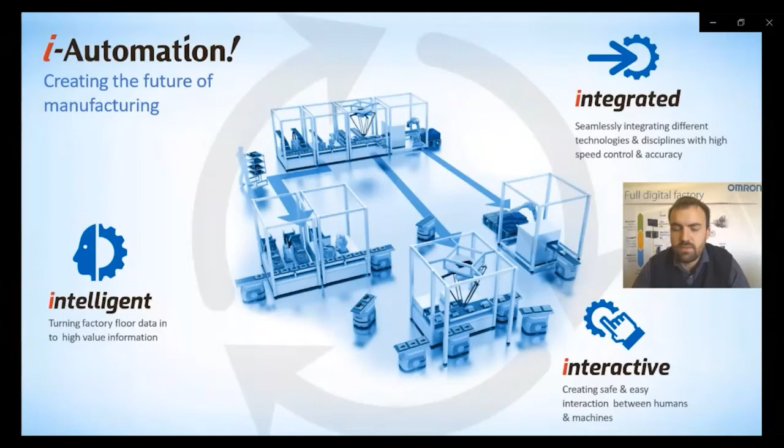The automation solutions we develop are designed to address the operational challenges manufacturers face when striving for highest quality, sustainability, and operational excellence. These solutions are efficiency, flexibility, safety, security, connectivity, and quality, which we will focus on today. Quality is achieved through our integrated high-speed, high-resolution inspection systems, combined with technology to enable serialization and traceability to ensure error-free products and waste reduction.

The challenge for manufacturers is how to harmonize all these external factors when they converge with manufacturing and their key business priorities: brand protection, sustainability, operational excellence, and ensuring the investment required to achieve highest quality products with full traceability.

OMRON's traceability through serialization: the regulations imposed by governments are getting more and more strict every day. Governments require manufacturers to track their products from where they're manufactured till where the consumer buys it. We find these regulations in almost all international companies.

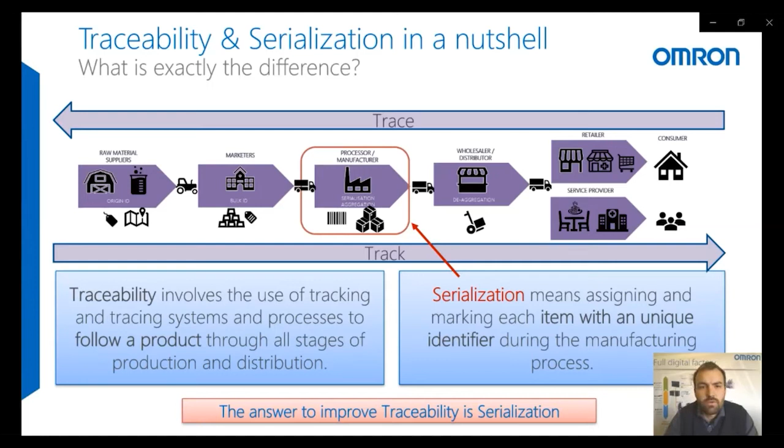A typical solution would look like the following. First of all, you would print the label, then verify the label with a camera, then read that barcode, sending it back to the cloud, and then aggregate all of this into one pallet where you can use an RFID tag, for instance.

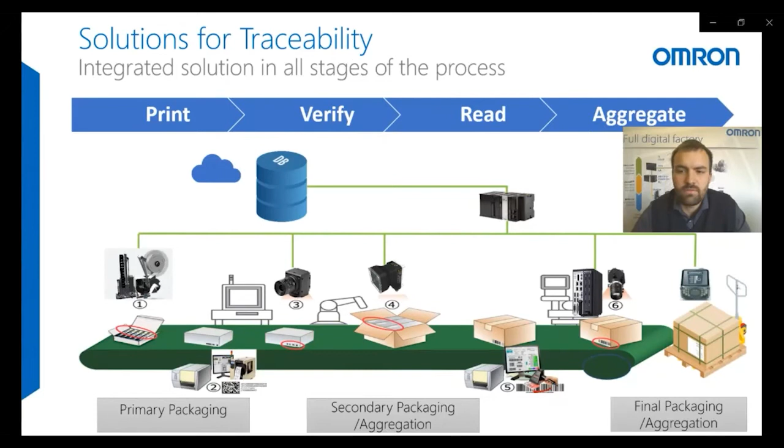The impact when deciding on a serialization product must be evaluated, taking into account that the solution is simple, quick, and has a low total cost of ownership. Therefore, choosing the right technology partner is key for successful implementation.

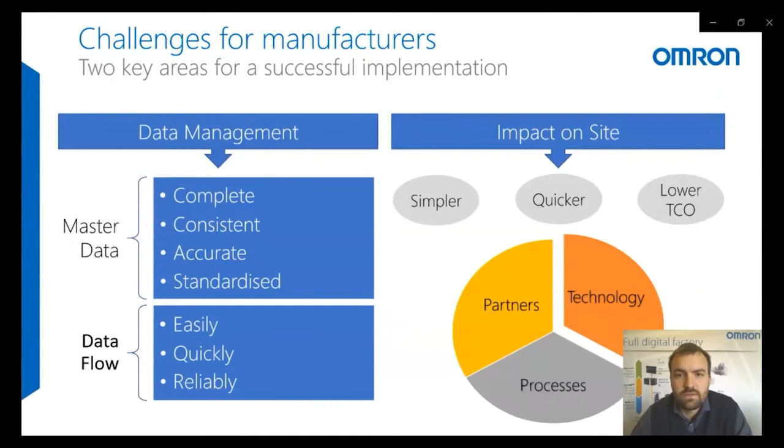So why OMRON? OMRON offers a full turnkey solution when it comes to traceability, from scanning the product, controlling it, and sending the data to a database. All of this is done through our powerful Sysmac platform.

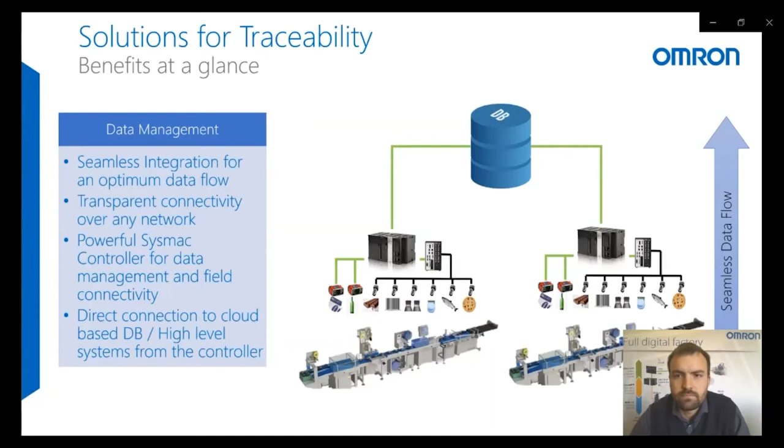On the scanning side, OMRON offers a wide variety from basic barcode readers to high-end, high-speed AI systems. These products are easy to use, compact, modern in appearance, design and usability. The camera that covers most of the portfolio is the FHV7 camera, the one you'll see here in the middle.

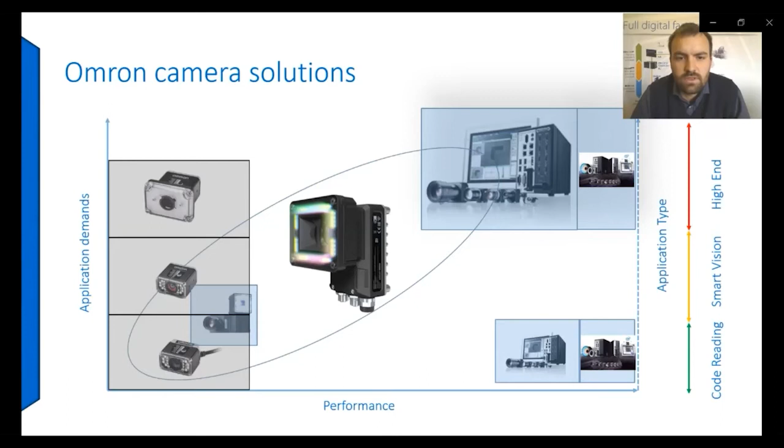Our latest camera launch, the FHV7, with its IP67 rating and best in class for speed and resolution, has the ability to get most vision jobs done without a hassle. Its modular approach also helps with consumer demands. The liquid lens just puts the cherry on top, with a perfect focus within 150 milliseconds.

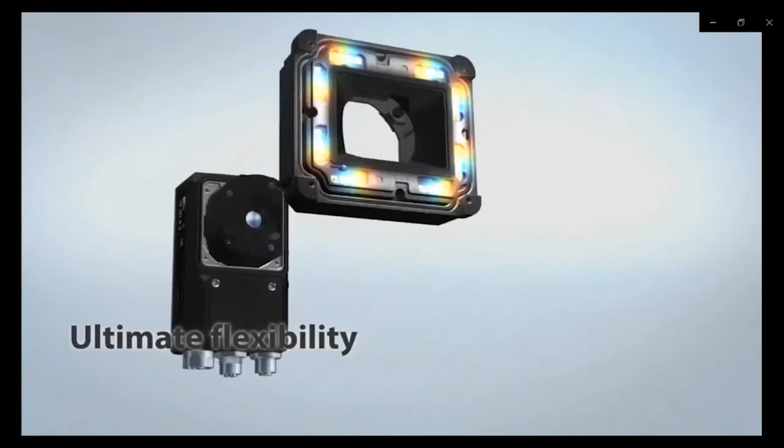OMRON technology is your key to a successful traceability and serialization project. OMRON's cameras read most barcode symbologies. With our vision systems, OCR fonts are teachable. Our RFID readers also help with robust packages.

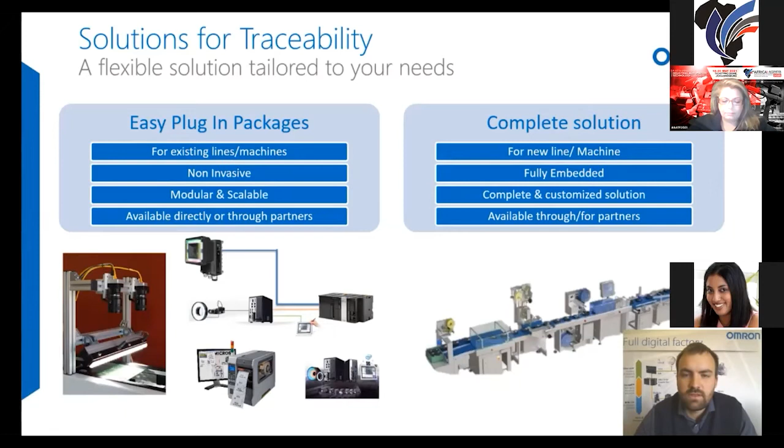OMRON has two different types of offerings for traceability and serialization. Plug-in packages: modular, scalable, and easy-to-implement packages for existing lines or machines at every stage of the manufacturing process. Then we also have complete solutions: fully embedded traceability for new lines or machines.

A few familiar applications where companies were very thankful they had a traceable solution implemented. The sardines recall that could have caused fatal illness. Some of the cans were compromised during the sauce filling step on the production line, which could affect the safety of consumers.

The Kuga recall: Ford recalled 4,556 1.6-liter EcoBoost Ford Kugas produced between December 2012 and February 2014. This was because of a coolant loss. Ford rerouted the coolant line and replaced the affected components.

Lastly, an everyday traceability example: the blood bank. Each qualified blood bag is affixed with a unique barcode or RFID tag with corresponding identifiable information such as blood type, the exact place where it is stored, collection date, and expiration date.

From the donor to the final recipient, the movement of each blood bag is being tracked. All the data is transmitted to the cloud in real time so that the hospital administrator has real-time visibility into the blood inventory.

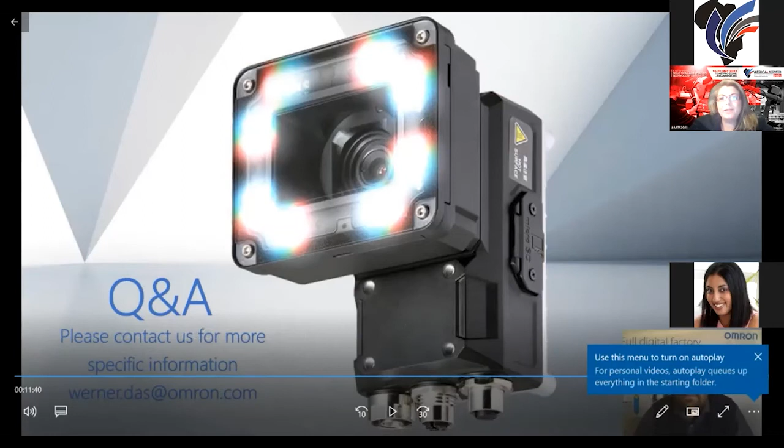The first question from the audience is, how does OMRON comply with FDA regulations?

OMRON added an electronic auditing system to its FH camera system, and this helps the manufacturing line comply with FDA 21 CFR Part 11, which requires an electronic record and digital signatures instead of paper-based documents. So with literally a tick of a box, you can add this auditing system to your camera system.

Oh wow, okay, so that sounds fairly simplified then. Yep.

The other question from the audience is, is there an affiliation between OMRON and GS1 in terms of code reading? I think I would direct this one to Khotso. He will take this answer.

Hi, can you hear me? We can hear you, Khotso. Yes, there is.